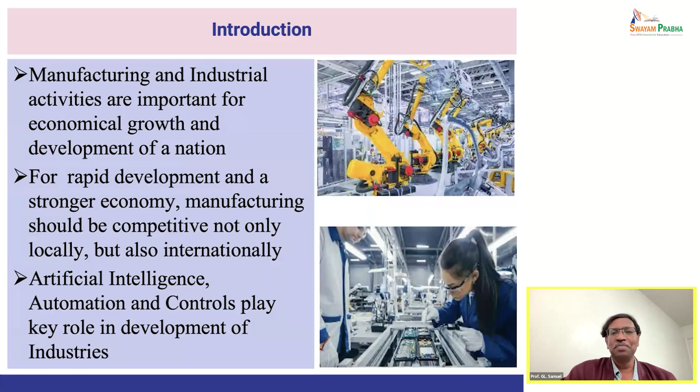As we all know, manufacturing is the most important area for the growth of any country. If the industry in a country is developed, we call that country a developed country. Industry is the backbone of the economy of a country. We have been looking at manufacturing from various aspects, and nowadays, with the introduction of artificial intelligence combined with manufacturing technologies, the developed countries are pursuing goals which are beyond our imagination.

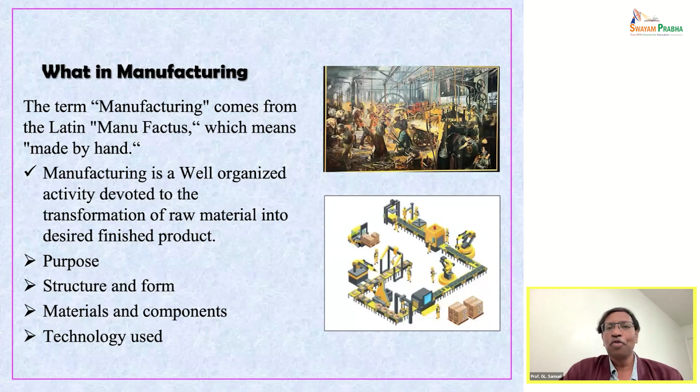Basically, the word manufacturing is derived from two Latin words, manu and factus. Manu means hand, and factus means made. So manufacturing literally means made with hand. But now we are able to manufacture components and even run a whole factory without the intervention of human beings. That is the development which has happened over several centuries.

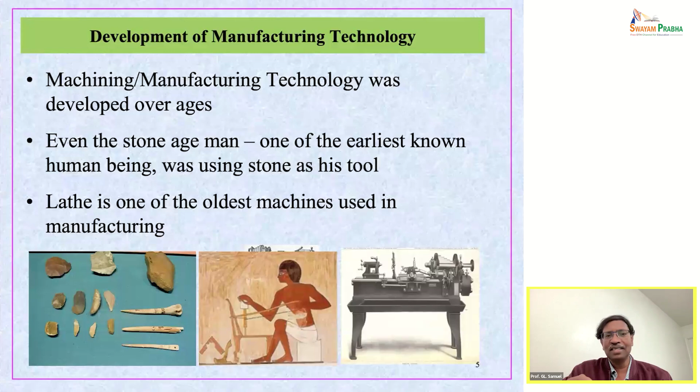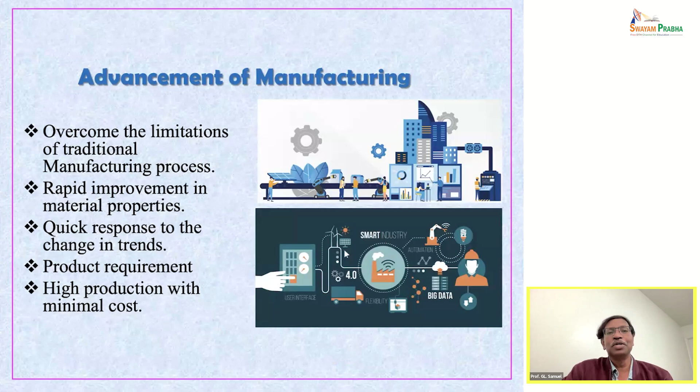If you go back in human history, we find that people were using sharp tools even during the Stone Age. We now know that when we make sharp things, we'll be able to cut. The concentration of stress, strain, and shear strength, all these things we know. Those days, even though they did not know it, they knew that we need a sharp tool to cut something. The lathe is one of the oldest machines, and it is called the mother of all machine tools. Thus manufacturing started there and quickly progressed to a level where we are able to produce components without the intervention of human beings.

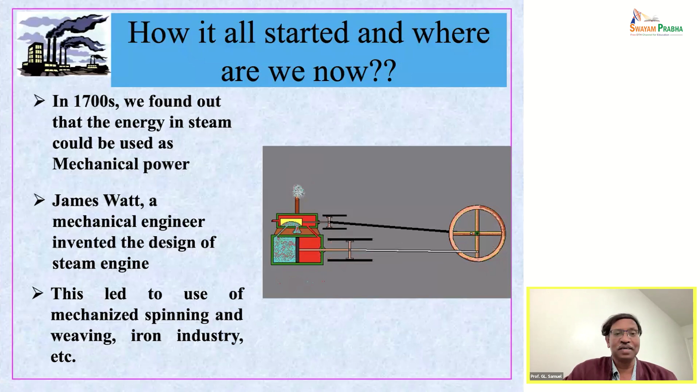When we look at what has contributed to this kind of revolution, we call it the industrial revolution. In the 1700s, the steam engine was invented, which contributed to the mechanization of machines. Mechanization means what the human hand, animal power or human power was doing started being done by steam power. That's how the first revolution started. Then the invention of electricity and IC chips all contributed to the development of industries.

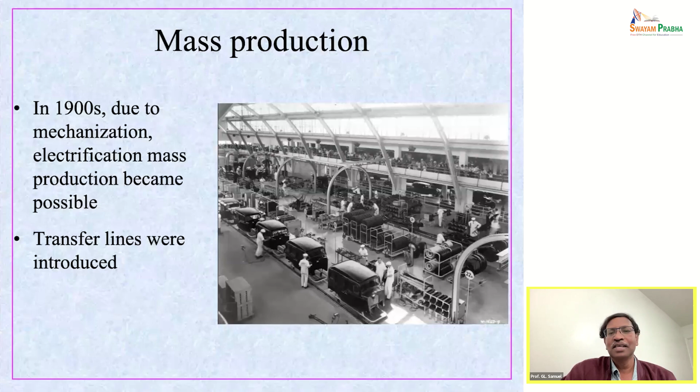Then in the 1900s, the industry started streamlining itself, and production demand increased a lot. If you look at the number of cell phones or automobiles which need to be manufactured, they run into millions. To meet that kind of requirement, traditional technology was not sufficient. So people have gone for several technologies, and one of them is CNC machining technology. After the Second World War, in the 1950s and 1960s, numerical controls and then computer numerical controls were introduced, and we started producing components at very high speed, with high accuracy and good surface finish.

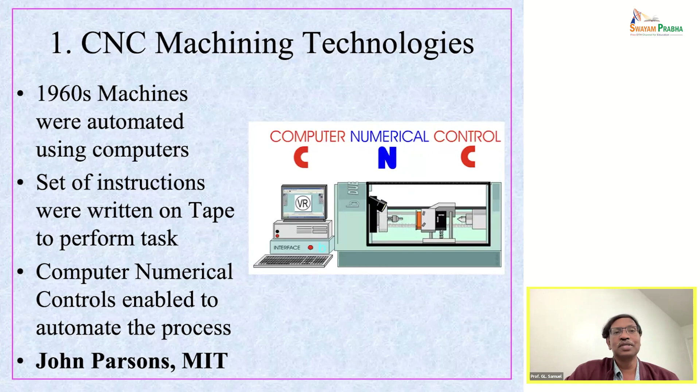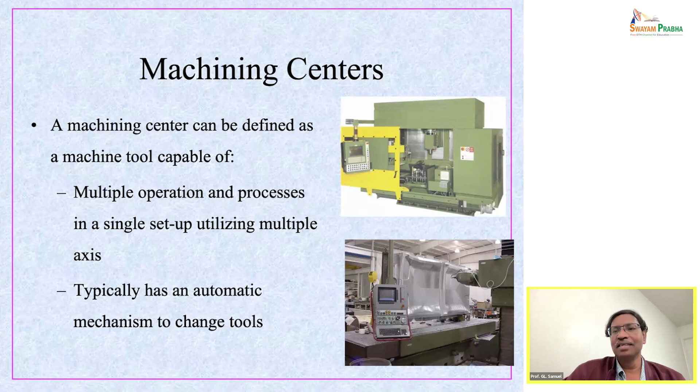Nowadays, if you look at the types of machining centers, you have even 21-axis control machines, and sizes vary from very small machines to very huge machine tools. The range of components manufactured and the surface finish achieved is really amazing. You can see the parts. Now we have what is called high speed machining technology, by means of which we'll be able to achieve the finish by machining itself.

So what we are seeing here.

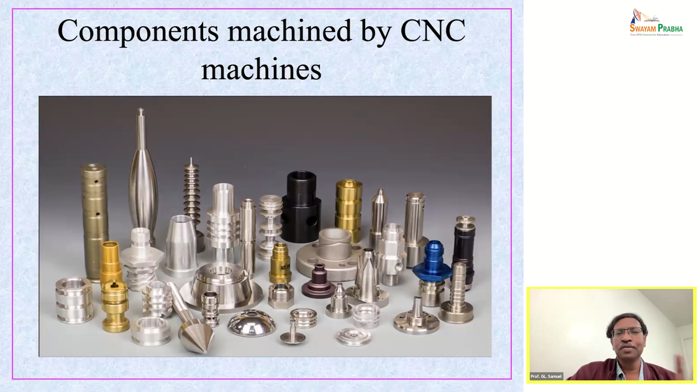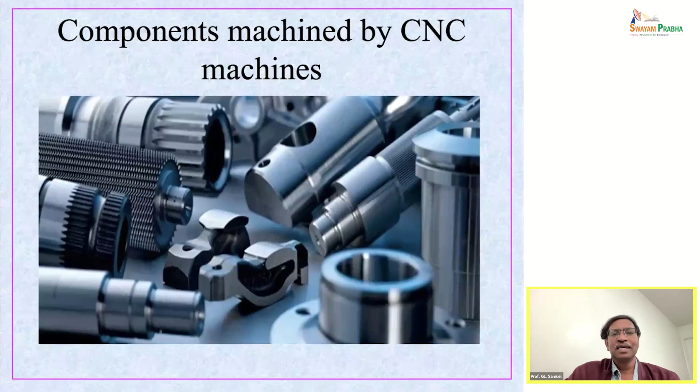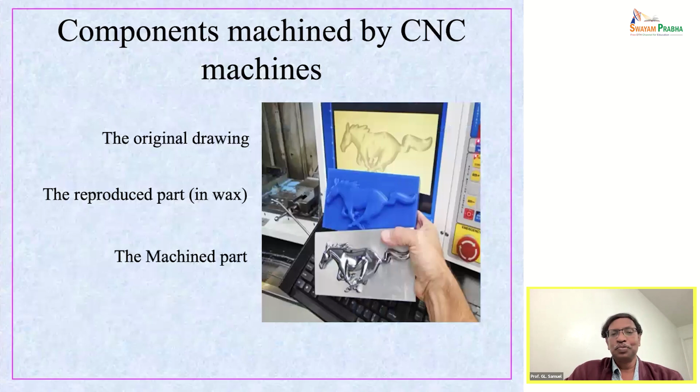Earlier what we used to do is turning, then go for grinding, and then go for super finishing operations to achieve a good surface finish. But nowadays we can do that with high speed machining technology. Also if you look at the complexity of these components, they vary from small sizes to very complicated components. But nowadays we have the technology to produce these components.

Now if you look at the components which have been machined, we have what is called freeform surfaces, where they don't follow standard curves like a circle, ellipse or other curves, but the shape actually varies freely. So we used to call them splines.

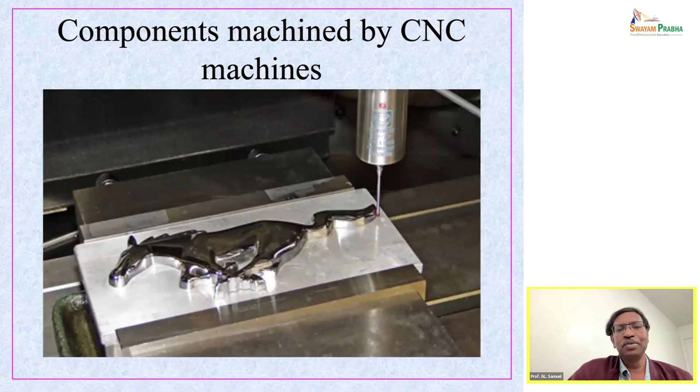But nowadays we have the control called NURBS, non-uniform rational B-spline curves. With that, we'll be able to control the geometry very accurately, and we have the machine tools by using which we'll be able to manufacture these kinds of complex and freeform shapes.

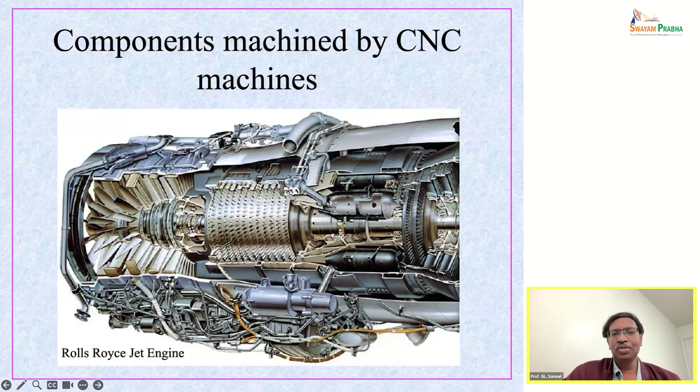When an aircraft accident happens, it becomes world news. But if you look at the number of people dying by accidents caused by aircraft compared to road accidents, the accidents caused by flights are minimum, while the people dying on the roads are very high. So the reliability has been built into such a complex system.

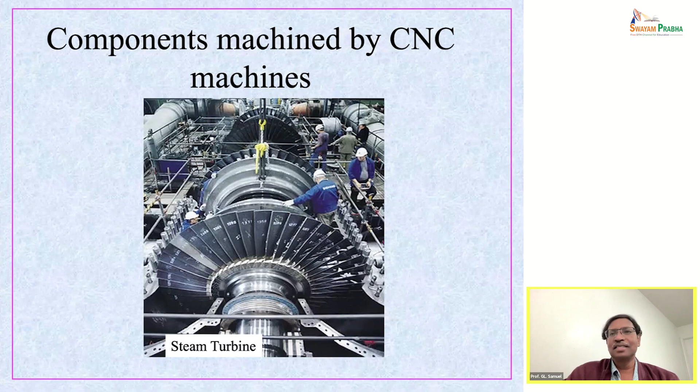So this is another example of how huge and complex the systems can become. As I said, high-speed machining is one of those technologies which have contributed to producing components with a very good surface finish, and usually the RPM, the rotational speed of the machine tools, is more than 20,000.

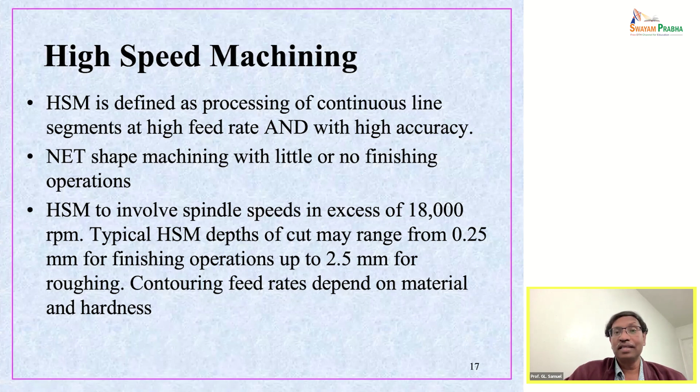So in some places they say 18,000 RPM, or it can be even more than 20,000 to 25,000. And nowadays we have very, very high speed machine tools where the spindle RPM can range up to 2 lakhs and more.

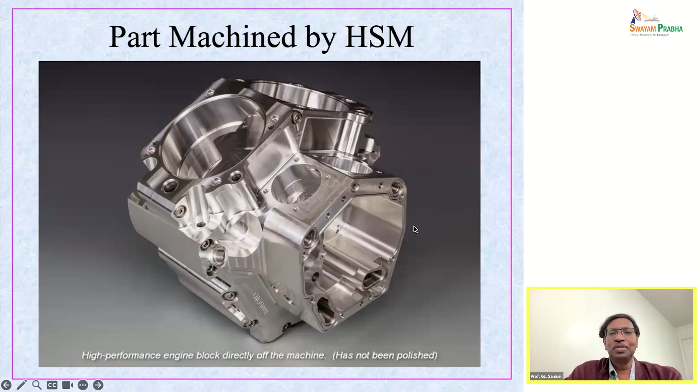So this is how when we do high speed machining, we'll be able to get components with a very good surface finish. There are several examples which we can show of how we'll be able to machine these kinds of components.

Another interesting technology which has come up recently is called diamond turning. If you look at the mirrors used in space applications, they need very high reflectivity. But at the same time, the mirrors we use in our bathrooms for domestic purposes cannot be used in space because the temperatures vary from plus or minus 180 to plus or minus 200 degrees centigrade.

When exposed to the sun, it will be plus 180 to 200 and above, and when there is no sunlight, it goes down to minus 180, minus 200 degrees centigrade. So how do you make mirrors work in this kind of harsh environment? We need metallic mirrors, and to produce these metallic mirrors we have been using the technology called diamond turning.

Here the diamond is used as the tool. You may say, fine, why not just put a diamond on any machine and then machine with it? No. Though diamond is the hardest material, it is very, very sensitive to vibration. So if you use a diamond tool and put it on an ordinary lathe machine and start turning, within no time it will break.

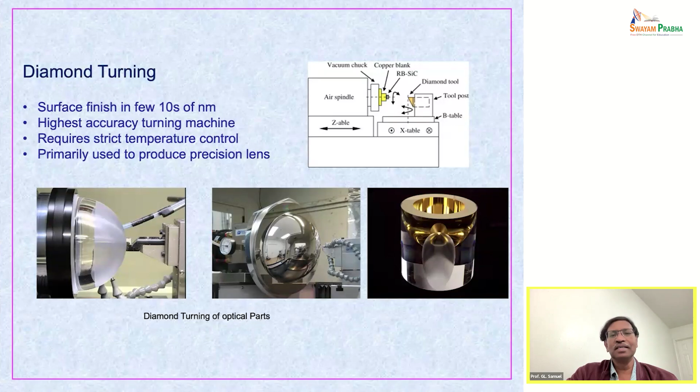Something around 99.999%. So in India we have such facilities where we are able to produce flat mirrors, spherical mirrors, and even aspherical mirrors using this diamond technology.

And also we have huge machines which are able to carry out multitasking. As we said, we'll be taking you to the laboratory visits and also to the research part, where we have the AMTDC, wherein this machine is located, you can go and have a look at it. You name any machining process, and this machine will be able to do it.

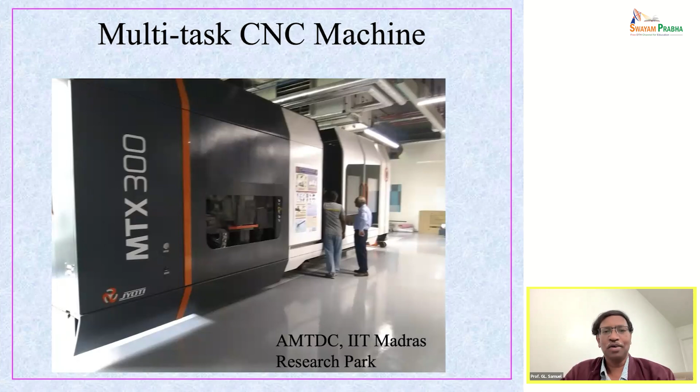And you can see the size. When a person standing here is about 6 feet, so this is the huge size. Thus CNC machines have developed to such an extent that we are able to have such huge machines which will be able to carry out almost every operation required for a complex and huge component.

That is on one side. But interestingly, on the other side of it, we have what is called micro and nano technology, where we want to produce components of a very, very small size.

Richard Feynman gave a statement long back, in 1959, saying there is plenty of room at the bottom - that means below 1 millimeter, there is plenty of space. But then people thought it may not be possible to make components like that. They also said, why can't we write the entire 24 volumes of Encyclopedia Britannica on the head of a pin? At that time, it looked impossible.

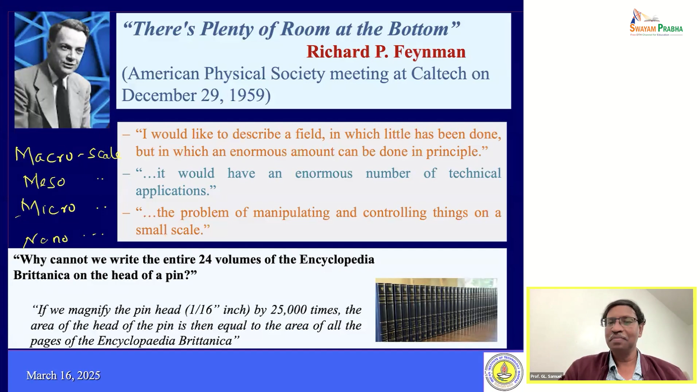But nowadays, it's almost very close to where we are able to make that possible. When we look at the gadgets we use every day - the cell phone, for example - earlier when the technology came, the size of the cell phone was very huge. But later, it has been made to such an extent that we can just carry it in our hand and take it wherever we need.

Similarly, the size of computers - it was a big hall-sized machine weighing several tons. But now we can actually make those computers so we can hold them in our hand.

Also, if you look at the size - when we were doing our PhD, myself at IIT Madras, we were measuring the memory and other things just in terms of KBs and at the most MBs, and the size of those computers were very huge. But nowadays, even small cell phones have much, much higher memory and computational power compared to those huge machines.

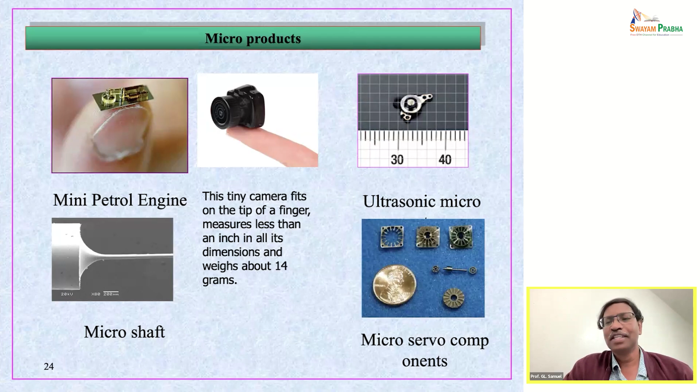Here are some examples, like a mini petrol engine and then cameras. I think these days cameras are coming in tiny sizes, of whatever order you can mention - so they're very, very small. They can be kept even on a pen or in any component; we'll be able to introduce these kinds of cameras.

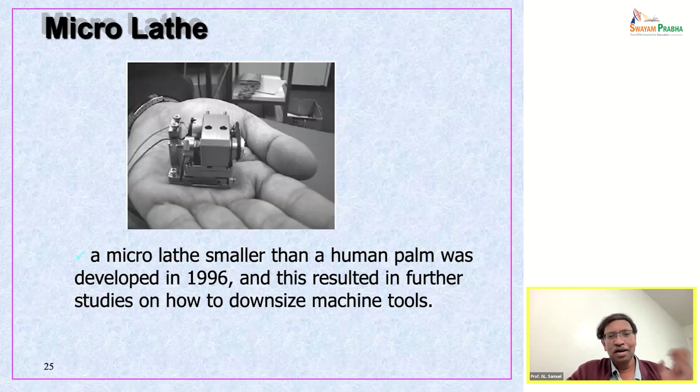Also, when you look at machines, usually we think that they are big and huge, but it is not so. We can actually make machines so small we can hold them right in the palm of our hand. These types of machines were even made decades ago, and nowadays we are able to produce very high speed machines with smaller sizes.

By using such tools, we can cut metals, drill holes, and make channels. So when you visit, please visit this facility and also look at the tools. If you keep them under the microscope, you can see how the profile of these tools has been made - they maintain the exact angles, the profile, and even helical profiles in these small tools.

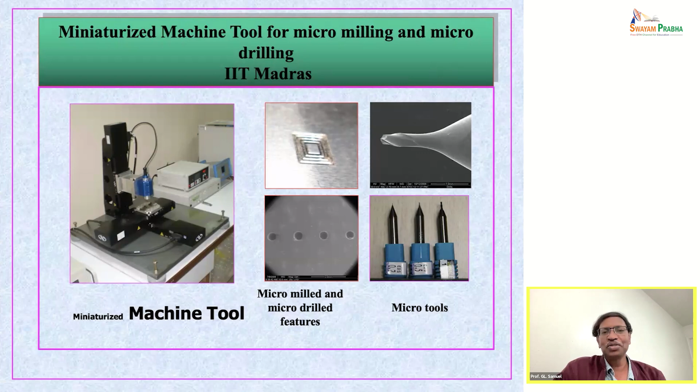Sometimes the microscopes are not able to magnify it enough, so we have to take SEM images. We have taken several SEM images of the micro tools, and you can have a look at the tools and also the images.

We also have an ultra high precision, high speed micro machining center located on the ground floor in the Ranganathan building. Students will take you there. Can you imagine - the spindle speed is 1,60,000 RPM, and the specialty is that it is vector controlled.

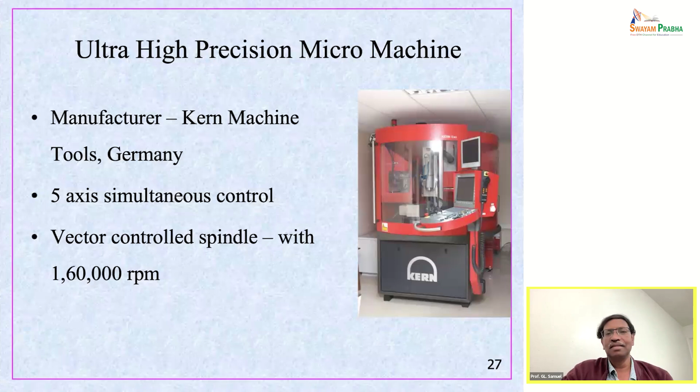That means when the tool is rotating, every angular position of it will be noted by the machine controller. It's actually a German make, and the controller is Heidenhain. So even when the spindle is rotating at such a high speed, 1,60,000 RPM, every angular position of it is being noted - that is how machine tools are made today. Here we can mount tools as small as 30 micrometers, 40 micrometers, and we can machine not only non-metals but also metals.

Actually, when we were purchasing this Kern machine tool, the manager of the company came and brought an interesting sample. They took the hair of the secretary of that Kern machine tool company and drilled a hole of about 30 micrometers. The hair of the European woman was about 60 micrometers. They drilled 30 micrometers and then inserted a copper EDM wire, electrical discharge machining, to prove that. So they made a through hole, and then they took the SEM image. He also brought the sample with the SEM image.

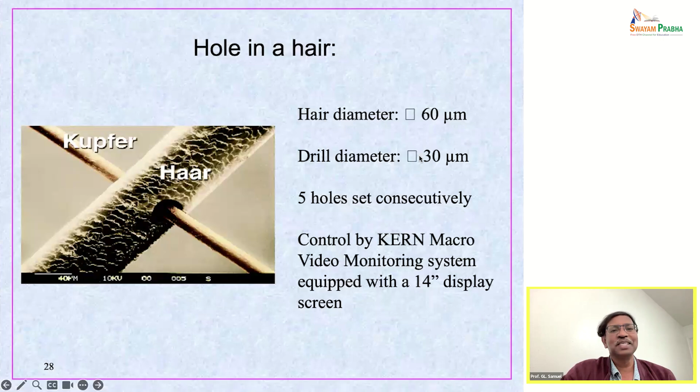So you may ask, what is this sample for? But there is a technology here, because we cannot drill a hole in the hair by using lasers, as it is going to burn. And we cannot use electrical discharge machining because hair is not a conductor. But by using mechanical tools of this order, 30 micrometers, they were able to drill a hole. So it's an amazing thing.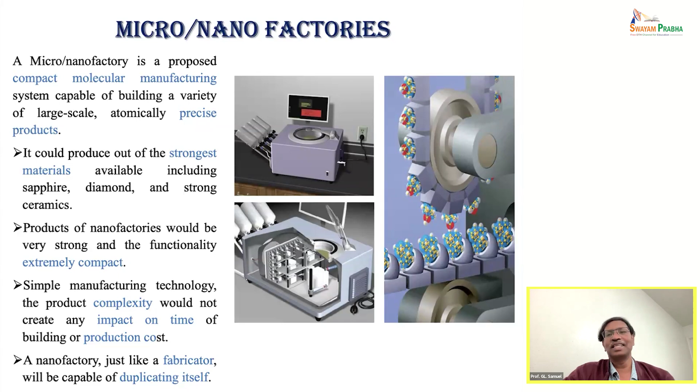We have been using this machine for several such applications. With all these technologies, we have now moved into what is called nano manufacturing, nanotechnology, and even micro or nano factories, wherein within a small size we'll be able to incorporate all the machines required and make them compact. There are concepts wherein we can even carry the whole factory with us, called portable factories, where you can carry the factory with you. That is how the technologies have developed.

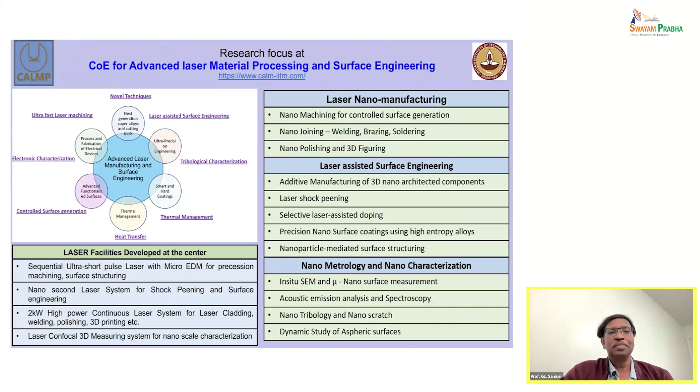The other interesting technologies we are looking at, and this course will concentrate on, are laser-based technologies. We have a center called the Center of Excellence for Advanced Laser Material Processing and Surface Engineering, as Professor Sushanta has mentioned. Here we have been looking at the applications of different types of lasers for various processes, and we'll be looking at their applications.

If you look at lasers, we can divide them into different categories, but for our sake I have made them into 3 categories: continuous lasers, and then what is called pulsed lasers, where we don't send the laser continuously but send them in pulses. That becomes a pulsed laser.

We can have microsecond lasers, nanosecond lasers, picosecond lasers, and femtosecond lasers. The speciality of these pulsed lasers is that we send the laser pulse in the time order of 10 to the power of -3, -6, -9, -12, or -15. When it is -15, we call them femtosecond. -9 is nanosecond. Picosecond is 10 to the power of -12.

When you are sending these pulses in that short period, something wonderful happens. I'll show this because it is interesting. When you put these pulses here, the top layer, where generally there will be free electrons since we are talking about machining metals, these free electrons will absorb the energy, generally in the order of 10 picoseconds. Once they absorb it, they get heated up, and before even much of the heat passes to the bulk of the material, they vaporize.

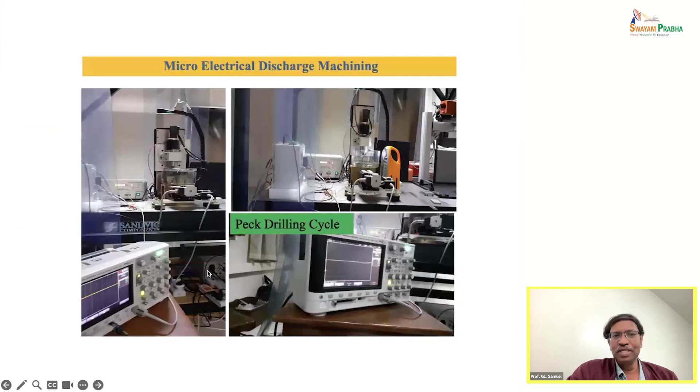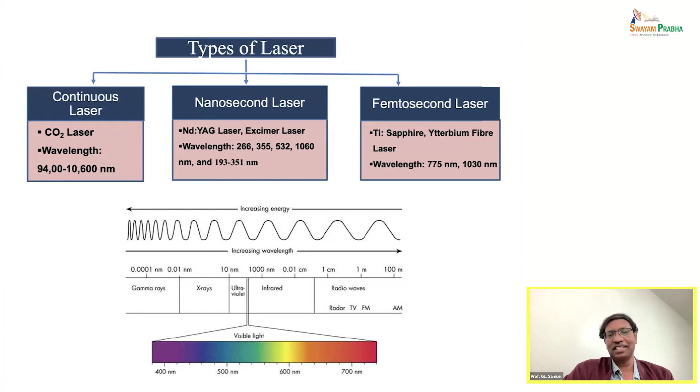Okay, I'll just go back to the slide about what I've been talking about. So when you put lasers with different wavelengths on the material, the materials behave differently. This is called laser material interaction, or laser matter interaction, and that's another interesting topic where we can work.

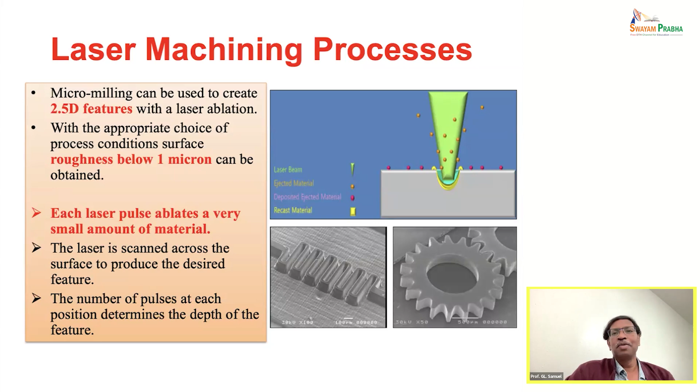There are several machining processes which we can carry out using lasers. We can machine them, mill the surface, get different shapes, and even produce complicated shapes using laser machining processes.

That means the knife which the doctor uses. Even to cut the eye, they cut just a layer, meaning a very fine cut. So the femtosecond laser will do that.

Now, if you want to cut a hole using the femtosecond laser, it takes a long time because it's very, very precise. But in an industry, when you want to put hundreds or even thousands of holes for a turbine, the material removal rate is not sufficient.

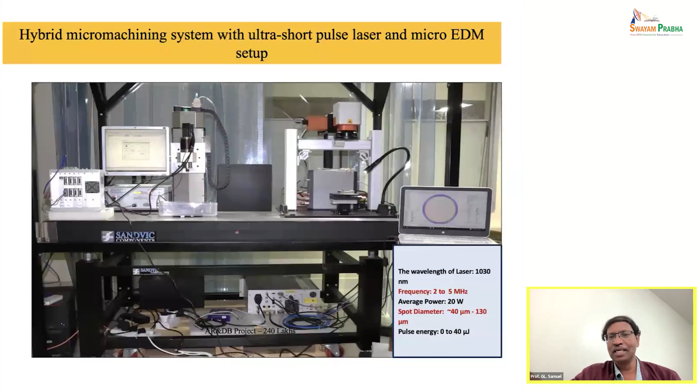But then on the other hand, we have the EDM process. In this case it's micro EDM, which has a much better material removal rate, or MRR as we call it. So what we have done is initially make the hole using electrical discharge machining, then finish the hole using the femtosecond laser. Thus we get higher material removal rate, and at the same time a very precise, accurate hole.

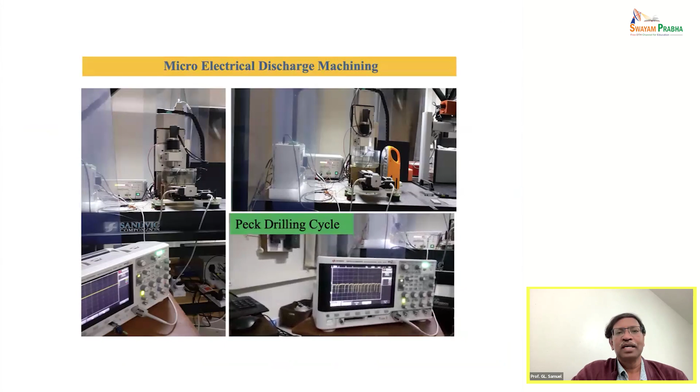So this I have already talked about. If you look at how micro EDM, electrical discharge machining, works, it's a very, very small diameter tool. And if we introduce the tool straight away into the workpiece, it's just a rod, it's going to break because there will be debris, and when it goes inside it gets stuck and breaks. So what we have done for that is called a peck drilling cycle.

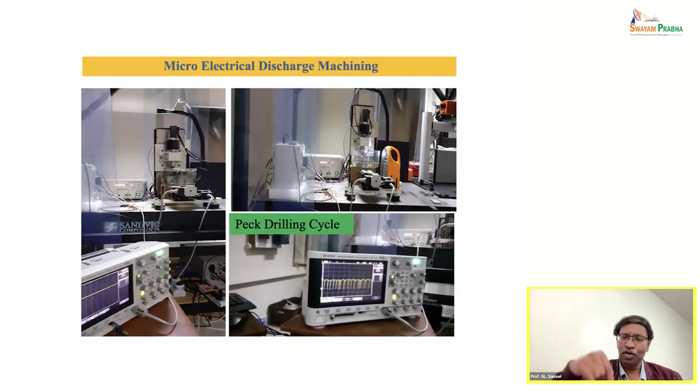So if you want to drill a 1 millimeter hole, first make a small one, maybe a fraction of a millimeter. Once that's done, take the tool back so the debris there can be removed. It's called the dielectric, it will be flowing and removes the debris. Then go down further, come back, retrieve, then go again.

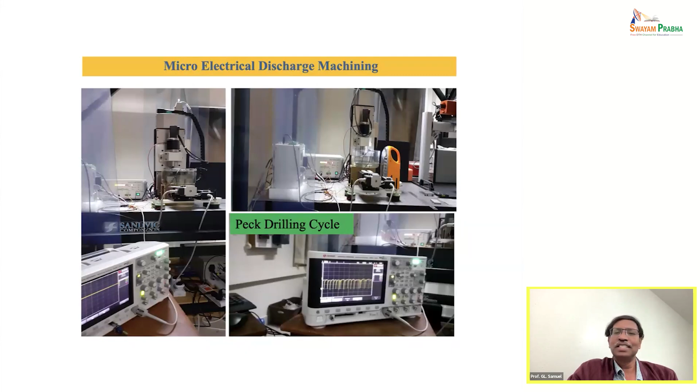This is called a pecking cycle, like birds when they peck grains, that's the way they do it. So it's called a pecking cycle, and this way we're able to drill the small holes. Then later we finish it using the lasers.

Here's another interesting concept which happens when using different types of lasers. This is a nanosecond laser, so you can also visit this facility. Here the pulses will be sent with a period of nanoseconds, and with high energy.

So what's going to happen is we use it for what's called laser shock peening. We take the workpiece, put it in a media like water or other media, then put the laser pulse on that. The laser pulse creates a shock wave, and that wave travels. You might be familiar with what's called residual stresses, which will be there when you machine a component. If you use that component with residual stresses, the life of the component actually decreases.

One application of this is the landing gear of an aircraft. Usually when the aircraft lands on the wheels, the landing gear takes a lot of load in a fraction of a second, kind of an impact load, and that cycle repeats. So if there are any residual stresses in the landing gear, the components actually fail.

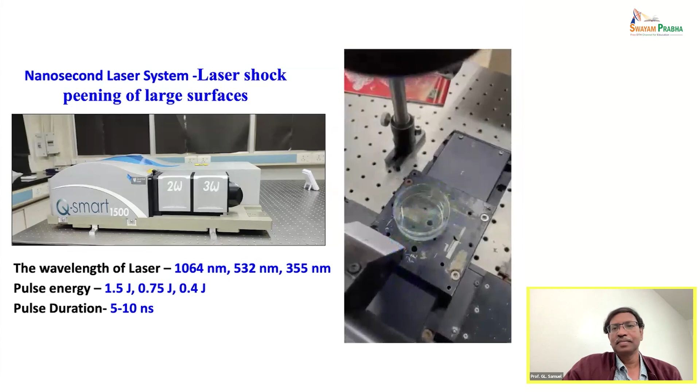So then we are actually using the continuous lasers for 3D printing. We have the laser, even this facility in the lab, so where you can look at it. We use the powders or the wire for carrying out the 3D printing. Nowadays, 3D printing has become a very important manufacturing process.

All this time we have been talking about what is called subtractive manufacturing. So you want to make a component, you machine and remove the material which is not necessary, and then use the component. That is the subtractive process. But then the thought process came, why do we need to remove material and waste it? Instead, if we can build where we need, that is more efficient. So that is the way the 3D printing technologies have come.

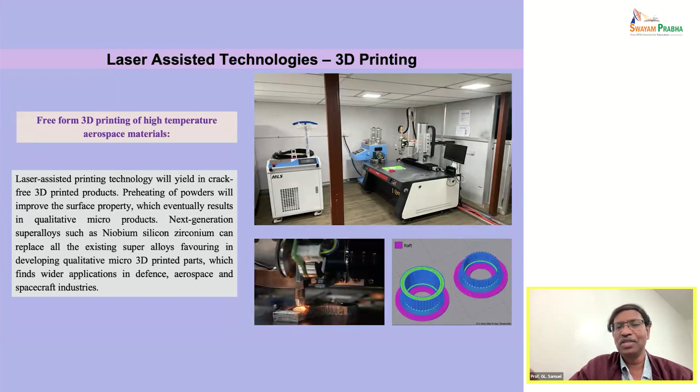And then we use the laser power to melt either the powder or the wire, based on the type of process which we are doing, and then it will be printing.

So you can also have a look at this machine. This machine actually we have designed and made with the help of a vendor right in Chennai. This is a multi-purpose machine. We can print with two different types of powders and control their composition. When we change this head, we can use it even for cutting or laser cladding.

Cladding means a huge, large thickness of material deposited over a soft core material. And also we can do this on cylindrical parts. We have a rotary head here, so we can put the component and carry out laser cladding on axisymmetric components.

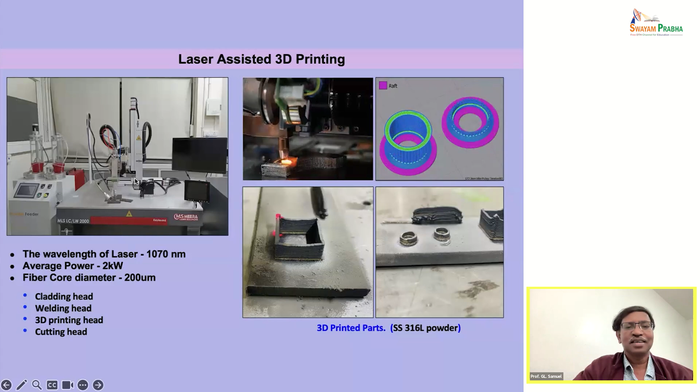So these are some of the components which we have made using the powders and also the wire. This is called directed energy deposition, where the energy is supplied by the laser.

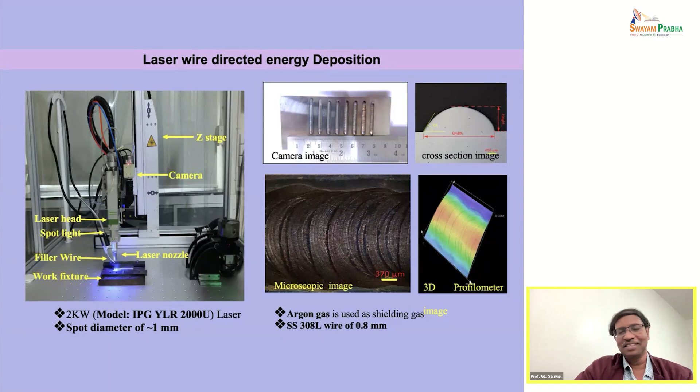Actually, it is an interesting fact to observe what kind of melting process takes place when you focus the laser on the powder or the wire. So for that, what we have done is, you can see here, we have put an IR camera, an infrared thermal camera, which is able to see the temperature.

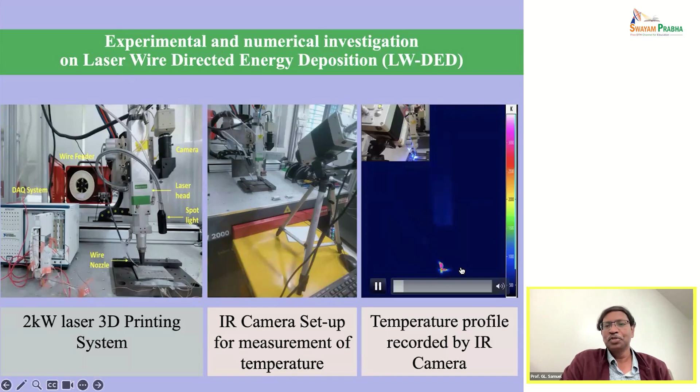In the video, you can notice here, when the wire is here and the laser is focused on it, it melts, and we call that a melt pool. I've been trying to understand how that melt pool behaves, what are the temperatures, and what its effects are on the quality of the component produced, when you have different temperatures, different rates at which you move the laser, and all these things. So we have been investigating this. You can have a look at that.

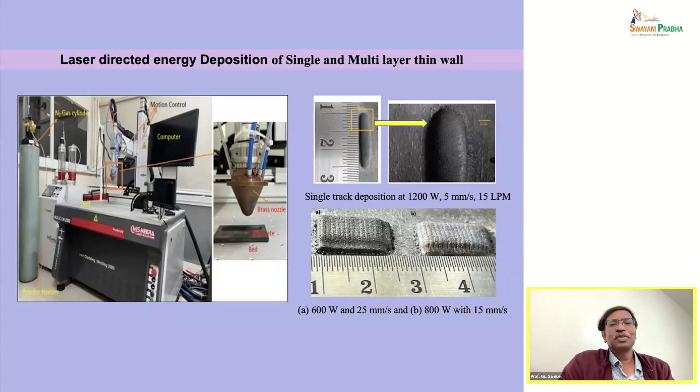So that's additive manufacturing, as I have said. It's also called layered manufacturing. By using these types of machines, we'll be able to work on metals. Most 3D printers, if you see, are all non-metal based, and mostly dealing with metals is very complicated because you need higher energy levels, and controlling that is a complex process. But we have been looking at this process.

Why is the additive manufacturing process very important? Because we can produce functional components. For example, if you have a machine and a component fails, they always take the example of a turbine blade component. So even when one blade fails, the whole component needs to be removed. We have to replace them, and that is expensive. The materials used are titanium, nickel, and single crystal type materials, which are very, very expensive.

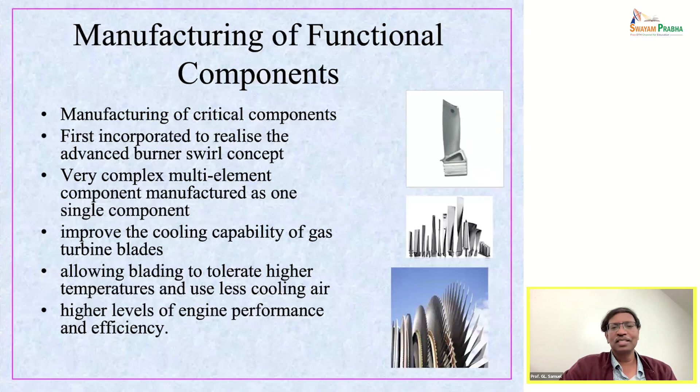So what we can do now is, we can make a component, fit them, or we can even use these types of 3D printing technologies, additive manufacturing technologies, for repairing the components. And I think recently we have been hearing, and Professor Satyan is also working on printing these materials using extraterrestrial materials. So in space, you can't carry a building from here, but use the materials available in space, and then print what we need. That is the way.

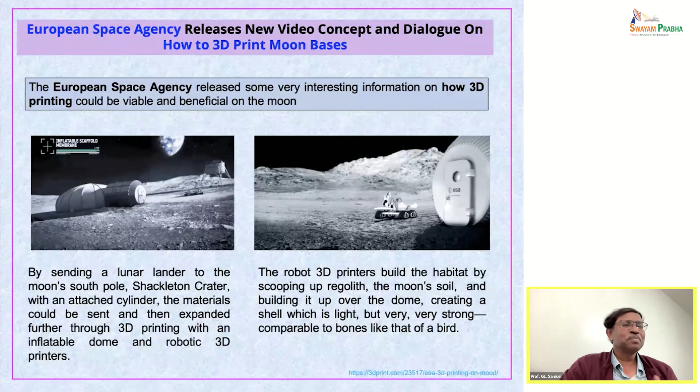Like, for example, today you are coming to the hostel and you may not have a bucket or a mug. So instead of carrying them, you print what size you want, what you need. Probably after a few days, these things will become a reality.

Okay, so any questions?

So we have another 17 minutes. If you have any questions, you can quickly ask so that I can know whether you are able to follow or not. Do you have any question, participant?

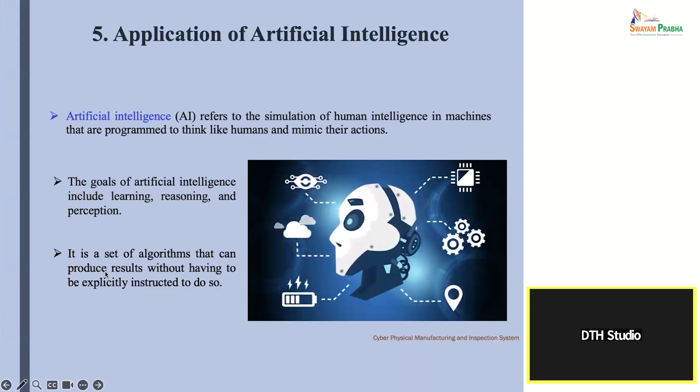Okay. Sir, can you just briefly explain about the femtosecond laser concept? I didn't get it much. Oh, okay. So what I am giving, all these things are just an introduction to give you an overview. But I have a lecture on, let me look at the date, the laser material processing, how actually it takes place. So I'll have a 1.5 hour lecture on that. So here I'm just giving the brief introduction of this process.

Anyone else having any doubts? Yeah. So it will be on Wednesday morning at 8:30. Laser assisted surface texturing and its applications. Sorry, on Tuesday. It's on Tuesday. Femtosecond laser micro machining and applications. So in that I'll give you more details. Yeah. So if you don't have questions, I'll quickly move on.

The application of artificial intelligence technologies has radically changed the way things were made. Earlier, when you talk about artificial intelligence, we thought it is for computer science and other circuit branches, but no. Now I'm going to show you an example of how we have used these artificial intelligence technologies for manufacturing. So we actually have a factory called autonomous factory, which you'll be visiting, where we have applied artificial intelligence techniques to the mechanical machines, and then they become intelligent, and they can even take the decision to carry out the production.

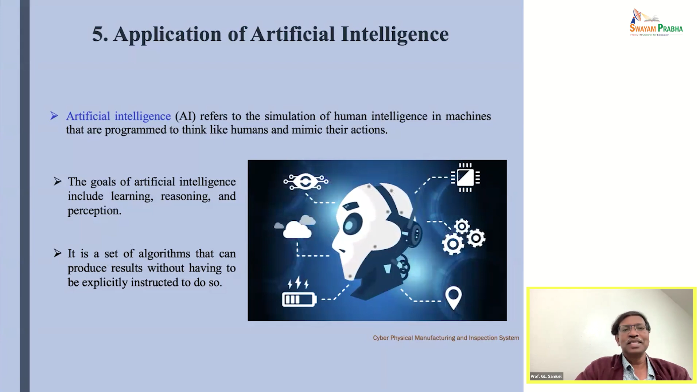So I'll also be giving the details of this on Friday. We'll be talking about application of AI for monitoring and control of autonomous factory. So when these artificial intelligence techniques are combined with mechanical or manufacturing processes, the way things have changed, I'll be talking to you in detail. So what is this artificial intelligence? It refers to the simulation of human intelligence by using machines. So the machines can carry out tasks like human beings do.

And nowadays you would have heard terms like machine learning, deep learning, AI kind of techniques, wherein by using them we can make the machine more intelligent than what it was created. Usually we used to say that computers and these machines will be as intelligent as the creator, only as much knowledge as we give. But nowadays it is not that. The machines can learn through experience, update their knowledge base and even become more intelligent. And also we have convolutional neural networks with a lot of hidden layers, by using which you'll be able to have knowledge processing and decision making as intelligent as human beings or even more.

Another interesting concept which has come up is what is called a digital twin. Probably you'd have heard about twins. Okay. But here we have a digital twin, wherein we can make the replica of a physical system digitally. We have a physical system and we can make a digital system. That is called a digital twin. The way the physical system behaves, the digital system also will behave. And then we can simulate a process or system behavior in the digital world, and send those commands to the physical system so that we'll be able to achieve the goal.

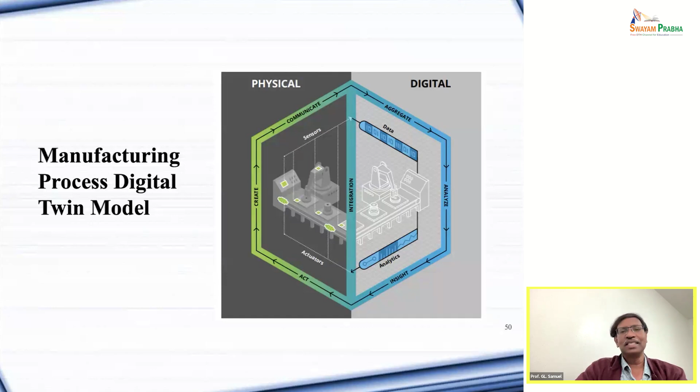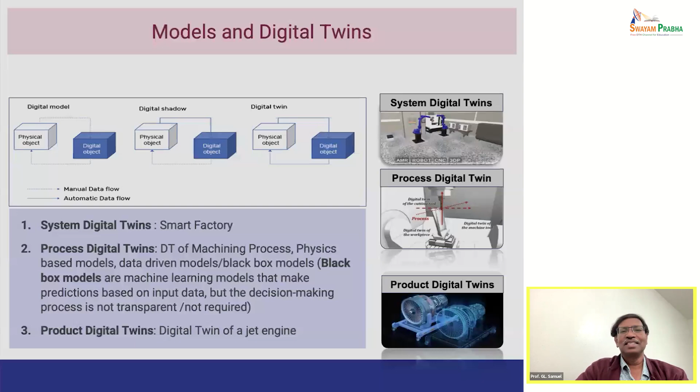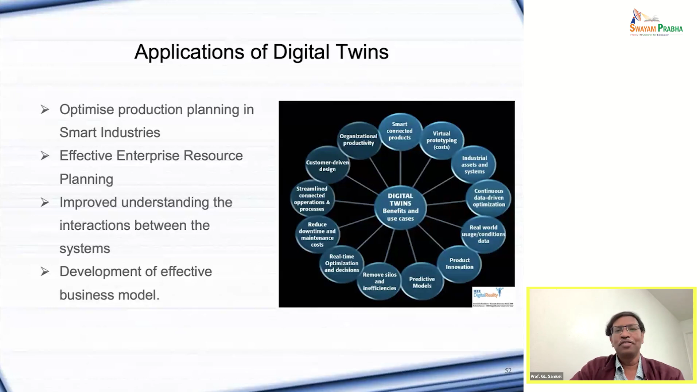So in the digital world, you can carry out several trials. And finally, once you have optimized your process, you can send it to the physical world and achieve the required goals in the first attempt itself. So there are details about these digital twins, where you can have digital twins at a system level, a process level or even a product level. These things also I'll be talking in detail on Friday. And there are several applications, from biology to chemistry to engineering, everywhere. They have been applying digital twins, and we have applications in the real world.

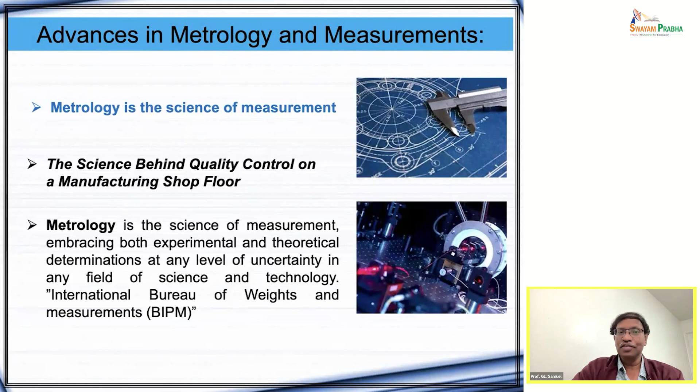And finally, I want to talk about metrology and measurement techniques. Many times in manufacturing, we talk about all the processes and everything, but forget about the measurements. And measurement is very, very crucial in making the parts. I don't know if you are familiar with the term metrology. Metrology is nothing but the science of measurement. It is very, very important because Lord Kelvin made a statement that when you can measure what you are speaking about and express it in terms of numbers, you know something about it.

But when you cannot measure it, when you cannot express it in numbers, your knowledge is of a meager and unsatisfactory kind. So to put this complicated statement into simple words, what he was trying to tell is that if you can't measure, you can't make it. If you can't measure, you can't make it. So that means all the processes we are talking about, if you can't measure, you'll not be able to make. Why is that true?

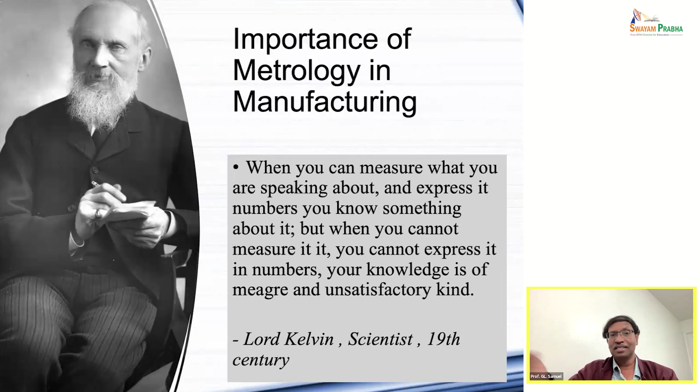For example, I told you about micro machining. Think that I made a micro hole of 10 micrometers and I am claiming that this is 10 micrometers. But how do you prove it? If you don't have any technology to measure and say that it is 10.1 micrometers or 10.5 or even 9.99, I can't prove that I have produced a hole of this size. So thus, if you can't measure it, you cannot produce it. So metrology is very, very important.

So please visit this lab which is there in the basement of the building where you are. It's MSB, the Mechanical Sciences Block. You are on the 3rd floor, but in the basement, just below the ground floor, you can find this instrument. One of the most popular instruments being used for measurements these days on the shop floor is the CMM. CMM is nothing but a coordinate measuring machine.

With the technology of just getting the coordinates of the component, the remaining calculations are done by the software. For example, if you want to measure the length, you touch at 2 points, it gives the XYZ components, then you fit a straight line, or you can use the distance formula and get the distance between them. So thus CMM is a very, very powerful tool. It is a comprehensive tool which will be able to make several measurements. Earlier, if I wanted to measure an angle, we'd have one device. If you wanted to measure the length, another device. But now by using CMM, you can carry out all these measurements in one single machine.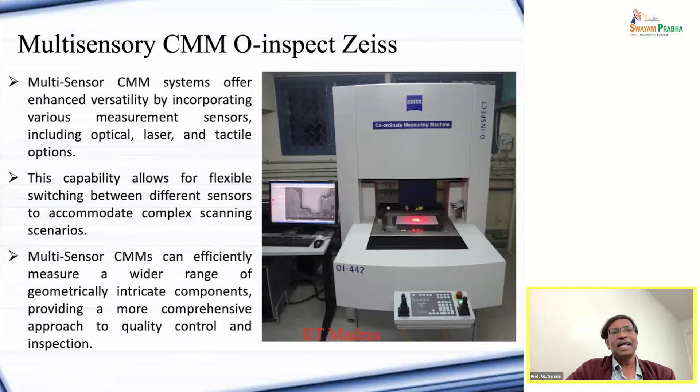And also, this CMM has multi-sensor technology. What is this multi-sensor technology? Usually CMMs will have a contact probe and make the measurement. Then this contact probe will be replaced by a non-contact measuring probe, which you see on the right side, and then they carry out the measurements. But that will not be efficient. Here what we can do is actually combine the signals from both the contact sensor and the camera, which is a non-contact sensor.

You may ask, what is the use? For example, if I have a big component with micro holes in it. If I have only contact, I can measure these dimensions, but my probe cannot go inside, so I cannot measure the diameter. If I take only non-contact, some of these measurements I'll not be able to get accurately. But now, for the outside dimensions, we can touch with the touch probe, and the micro holes I can see with the non-contact camera and then measure.

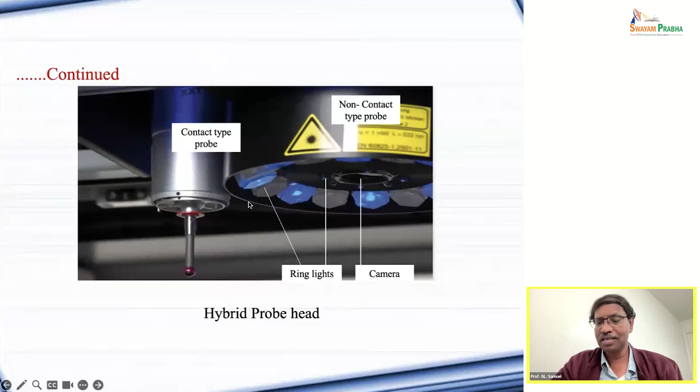And the software here has a facility. It combines both data and finally gives me the dimensions of the component, where exactly this micro hole is located, and what the dimensions of that micro hole are. So that is how the instruments are now, which are sophisticated, and you'll be able to use them for multi-purpose measurements. Another interesting measurement technology which we have used is called computed tomography.

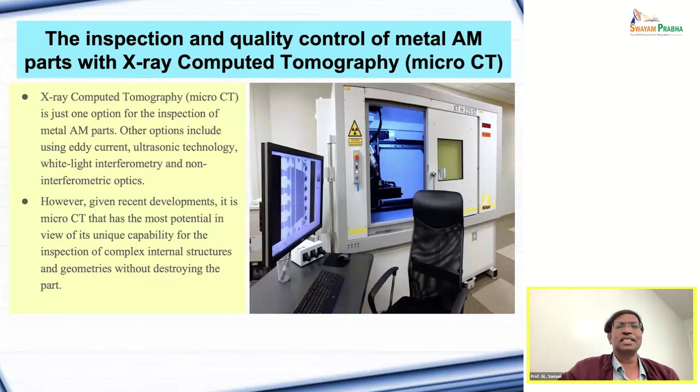You might have heard about CT scans for biological organs, like our internal organs. But now we can use this technology for making measurements in solid material without cutting them, or rather, as non-destructive testing. So that is possible. Actually, for some turbine blades and holes, we also use this CT for making the measurement. This facility is there in the design section; we have an NDT section there. We have not planned the visit, but if any of you are really interested, you can go there.

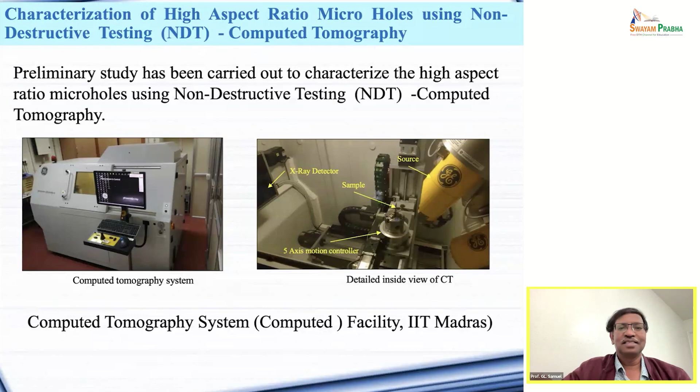There are two heads, micro CT and ordinary CT. Depending on the type of hole, the size of the hole which you are measuring, we can change the heads and then inspect. So this is called CT, computed tomography, micro CT. That is the micro one. The other one is ordinary CT, computed tomography.

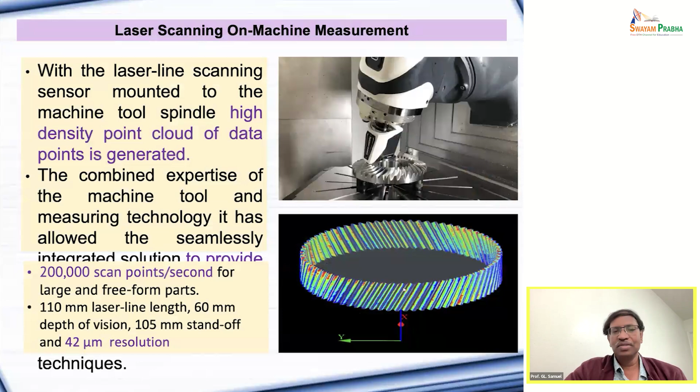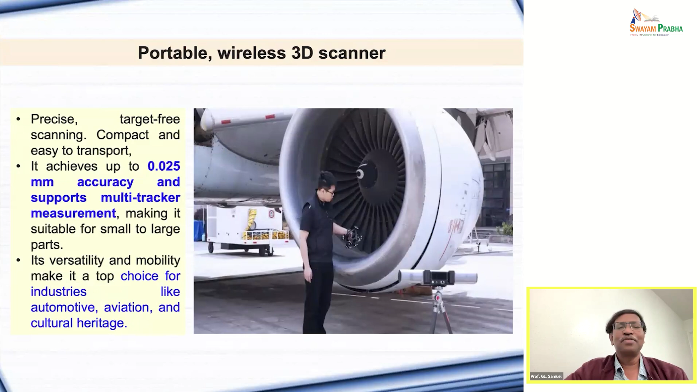And also we have several types of scanners which are being used. Nowadays, if you want to measure even very huge components, the scanners are handheld, or they can even be mounted on drones, and we'll be able to make the measurements on large components.

And we have even been going one step ahead. We can even carry out the inspection virtually. We can actually check the sizes of the component and the surface finish of the components virtually, for components which have been made in the virtual world. So you may not have a physical component, but you can do virtual machining and make the component, and then we can carry out the inspection.

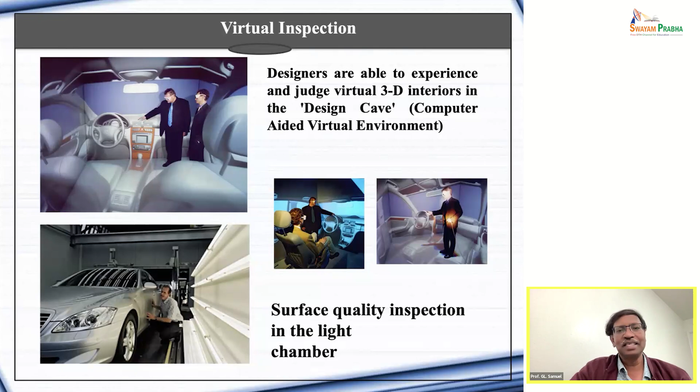So thus we have several technologies. I have just limited it to the facilities and the research we have been carrying out, and I have told these examples. As I said in the beginning, initially manufacturing meant making with hand. But nowadays, with the help of all the industrial revolutions which have happened: Industrial Revolution 1, mechanization, steam power, and power weaving looms. Then Industry 2.0, mass production, and the electrical power which contributed to that.

Then Industry 3.0, automation and the introduction of computers. And then Industry 4.0, where we talk about cyber physical systems, Internet of Things, and IIoT, meaning Industrial Internet of Things. And now we have been moving into Industry 5.0, where we talk about autonomous factories, and we can carry out this whole process without the intervention of human beings.

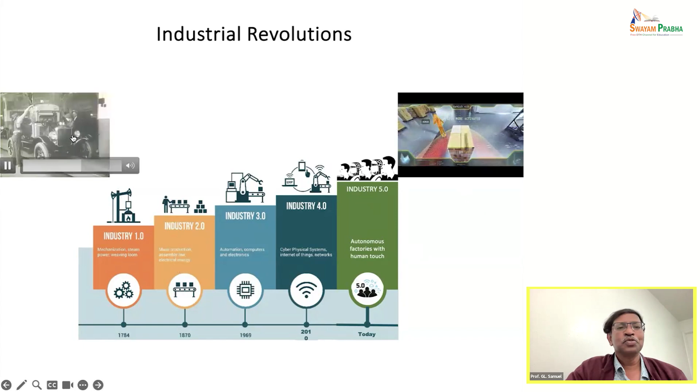The video on the left shows mass production, Industry 2.0, where Ford was making cars. You can see the assembly lines and how they're making them. But on the right side, you can see how the work can be carried out virtually, and then later the same thing can be done by the physical system. So both the computer environment and the physical environment can interact with each other and carry out the task. These are the developments which have happened over the years, and we stand here today.

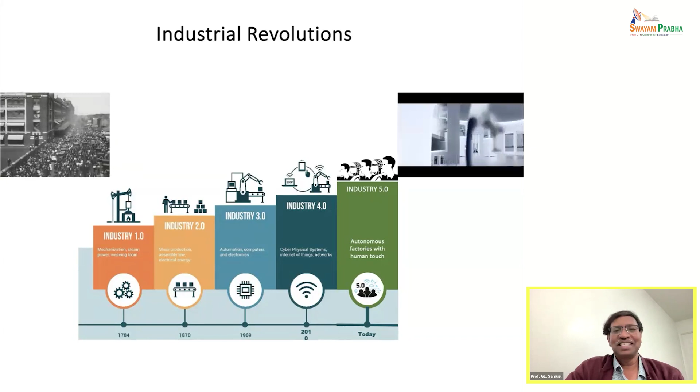Sir, I have one question. With the X-ray micro-CT facility, can we map the porosity of a metal part and then reconstruct it to get a virtual object like a CAD design, so that simulation can be performed later? Is it possible, sir?

Yes, it is possible. The way the CT scan works is that it takes the scan layer by layer. If you take one image, we have actually taken micro holes. In a plane there'll be a hole and we can see its size. Then it moves by a fraction, a few micrometers, and takes another section. If you imagine it is a cone, the diameter would have decreased. Then you move above, again a smaller one. We have geometric software where we'll be able to rebuild them,

and you can see the 3D. That's what doctors do when they scan our brain: it's done layer by layer and sometimes at different angles, and it combines all the images and finally gives something like a real solid, so you can work on that. Nowadays we are even using CT scanned images for 3D printing. If there is a bone fracture, they take the CT scans, the geometry is reconstructed, then given for 3D printing, it slices and creates STL files, and finally we can 3D print it. So obviously you can do simulation. Thank you, sir.